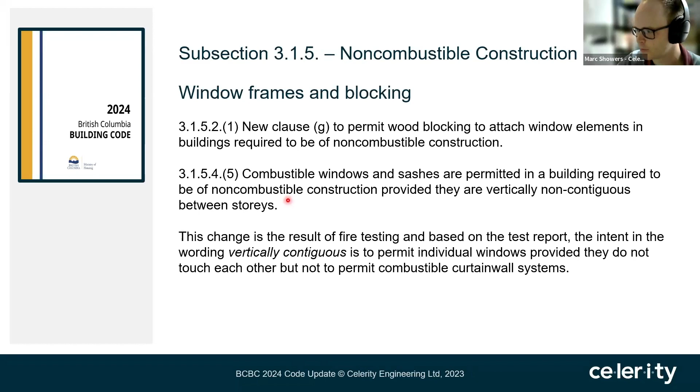All right, next we have a topic that's caused quite a lot of confusion, I think, in the past. It's all about fire separations and joint fire stopping. So previously in the code, 3.1.8.3 talks about how do you maintain the continuity of your fire separations. So you have a gypsum board wall butting up into a masonry wall or some other type of construction, two dissimilar types of construction. What do you have to do there? It used to just say you need to maintain the continuity. It didn't really tell you how to do that. So this has been clarified quite a bit.

It now actually has a standardized test that you need to provide. And this is a system that's tested to CAN-ULC S115 and has an FT rating that's the same as the fire resistance rating of the two abutting fire separations. This is something that's been done, I think, quite a bit in industry previously, but now it's actually written into the code this way. So just be aware of that.

Exterior wall joints similarly have been clarified. They provided this ASTM test standard that you need to meet. Often what would come up before is a municipality would request an engineering judgment or an alternative solution to allow you to use a system that was tested to this standard. So just be aware, if you have a curtain wall system, you do need an actual tested fire stop there between the curtain wall and the slab edge.

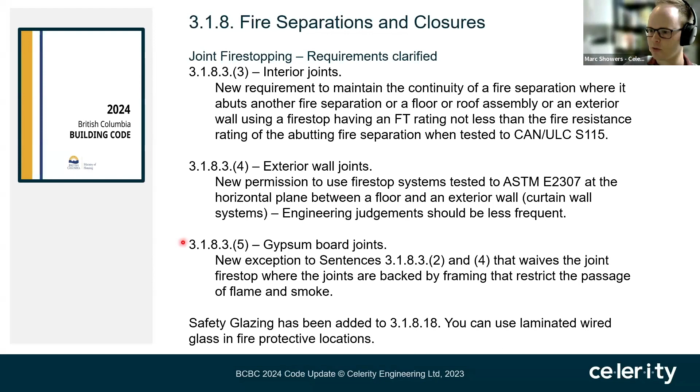Okay, mid-rise construction. This is specific to 5- and 6-story light wood frame construction types. There's a few relaxations that have been added in here, actually.

You may know, if you've done these types of buildings previously, you had to have 10% of the building perimeter within 15 meters of a street. That requirement was actually removed. So now you just need to have your principal entrance within 15 meters of the street, but there's no minimum perimeter. I don't think this will affect many projects, but it will allow some different sites to use this construction. If you have a long, narrow site, this might come into play.

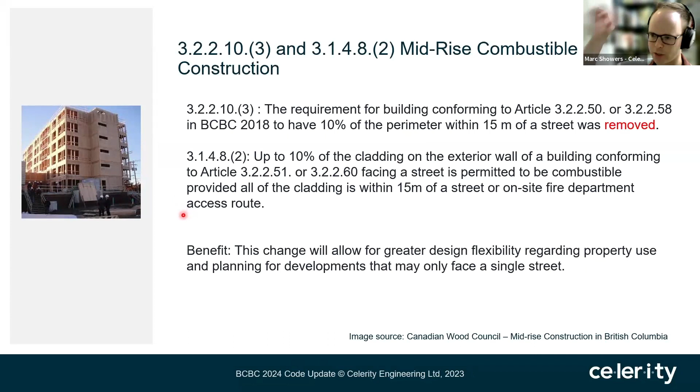There's also been an allowance added to use some combustible cladding for these types of buildings. Previously, it was really limited to non-combustible cladding, but they've added an allowance for up to 10% of cladding on an exterior wall within 15 meters of a street or fire department access route to be combustible. So kind of a feature wall close to the street can have a bit of combustible cladding. Just a bit of extra flexibility for these types of buildings, which is nice.

I'll probably go through most of this stuff fairly quickly until we get to washrooms, because it's relatively straightforward. Accessibility and washrooms is where a bulk of the changes have come in. So bear with me if I go through some of this a little bit quickly.

Door widths, so egress and accessibility alignment. There's been an increase in the required door width from 800 to 850 clear width. That's applied in 3.3, which is safety within floor areas, so that would be most places in your floor area or your floor. It's also applied in 3.4 for exits, so those have also increased to 850. You'll have to make sure that you're meeting that. Generally, that would mean a 3-foot door in most locations.

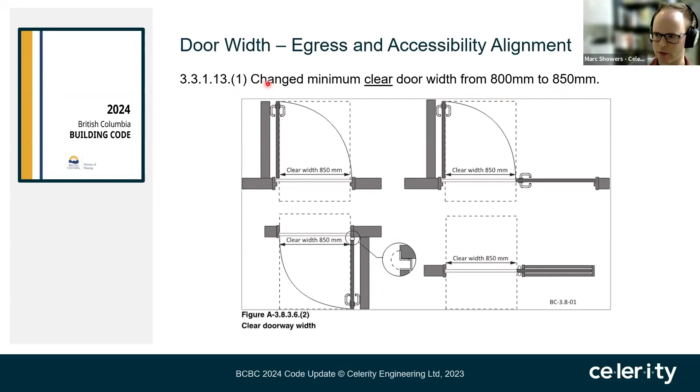Tactile warning. This was a bit of a source of confusion in the past. The code wasn't really super clear where you needed these things, or if you needed them in exit stairs. It's been clarified that you don't need them in enclosed exit stairs anymore, or enclosed stairs in general. So in most cases, exit stairs, you wouldn't need them. You would need them if you had an open stair to a mezzanine or an interconnected floor space. I believe the intention is that if somebody is going into an exit stair, even if they're visually impaired, they're generally expected to be aware that they're going into an exit stair. There's some new requirements around signage that we'll talk about in a minute to address that.

But for any unenclosed stair or other types of drop-off edges, you will need to have a tactile warning. The standard for how these things need to be designed has also been clarified. They now need to comply with the CSA B651 accessibility standard, so that'll look like something like this. You're seeing these more and more places, these truncated domes, I believe they're called. If you're reviewing product information, you'll probably just need to check that it does meet that standard. You can't just apply a strip of sandpaper or something, like you used to see sometimes. There wouldn't really be much done there. So it's a little bit more standardized now what you need to do. Just be aware of that.

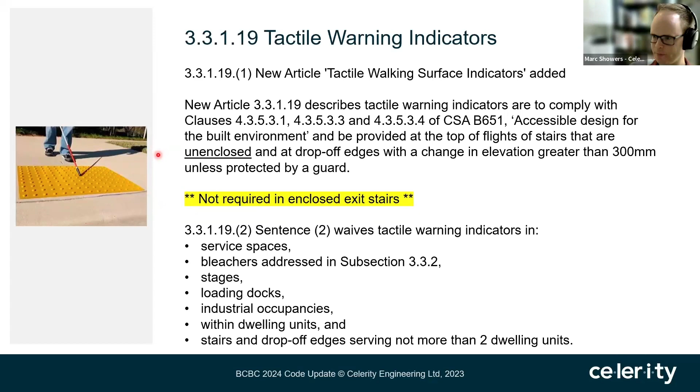Safety glazing. This has to do with wired glass. I think wired glass has been a bit of a contentious topic in recent years. It doesn't achieve an impact rating, or maybe it used to, but that's been removed. So there's a risk of severe injury if somebody runs into these things. You could still use wired glass, especially where there's a fire rating required. That hasn't changed. The only thing that's been changed is this new requirement in 332, specific to assembly occupancies. They need to have a safety film added to the wire glass so that it does achieve an impact rating. So you can use the wire glass, but it gets a laminate applied to it so that you can't break through it anymore, basically.

And that also applies to shower and bathtub enclosures. I don't know that I've ever seen wired glass used in those cases, but it does apply if for some reason you were to do that. Again, this is specific to assembly occupancies, at least in 3.3.2.17. So just be aware of that. I think wired glass generally isn't recommended where there's an impact risk, even in other occupancies, but that hasn't really translated into any changes in the code yet.

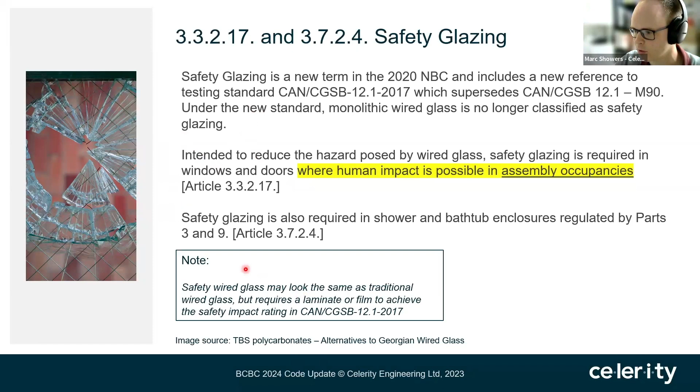So it looks the same as traditional wired glass, but there's a laminate or film applied to it to achieve the impact rating. There's a couple of exceptions for that. I won't go through this in detail, but where you have a door and the glazing is above a certain height, or similarly with windows, if they're above a certain height, then you don't need to meet that impact rating anymore.

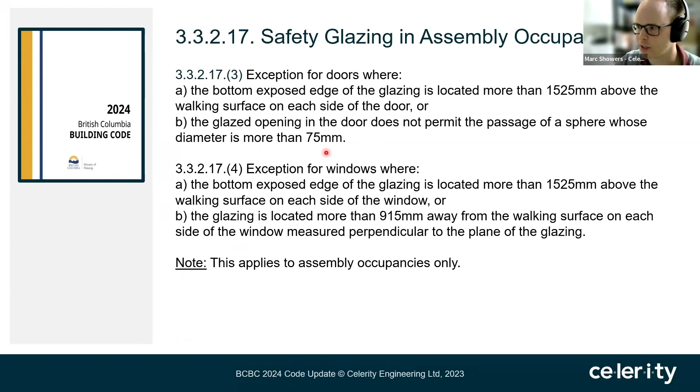Okay, so now we're going to move into exits 3.4. Couple of relatively minor changes.

Ramps. So in 3.4, there's a section on ramps. It would only apply to ramps that aren't in an accessible path of travel, because if you are in an accessible path of travel, you have to go to 3.8 for accessibility. However, in 3.4, they've actually changed the slope to a maximum of 1 in 12, which is the same as the accessibility section, so the slope would be the same in either case. The only exception is industrial occupancies, which are allowed to be steeper for interior ramps, up to 1 in 6, or 1 in 10 for exterior ramps. That might happen in a parking garage. You just have to be careful, because if it's in a location that does need to be accessible, which with the new accessibility requirements will be a lot of locations, you would still need to meet 3.8. So be careful if you're going to try and apply this.

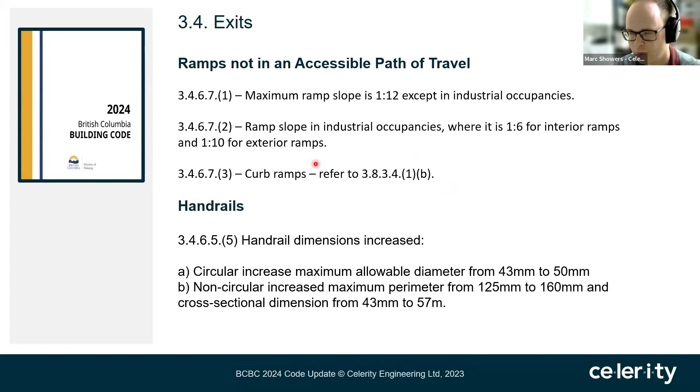Handrail dimensions have actually increased, so it gives you some more options. Circular handrails are up from 43 millimeters to 50, so roughly 2 inches should be okay now. Non-circular, you don't see as many of those, but they've also increased to give you some more options.

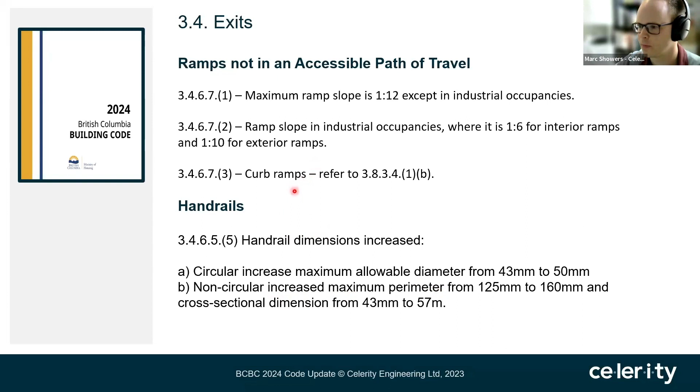Okay, so tactile signage. I mentioned this previously, briefly. This has generally been added throughout the code in 3.4 for exit signage, but also in 3.8 for more wayfinding directional signage. In 3.4, it's mostly the life safety type signage. So on exit doors, you need to have a sign that says in visual and tactile form that it's an exit door. This is a sign on the door. You still need the illuminated exit signage above your door, so that hasn't changed. This is just an extra thing you'll need.

Similarly, any other location where there's a life safety signage requirement, it now requires that to be provided in visual and tactile form. A couple examples here: delayed egress exit hardware, so mag locks, crossover floors. If you need crossover floors, there are signage requirements to say where those are and which floors they are, so those need to be provided in tactile form, and also floor numbering signage within your stairs.

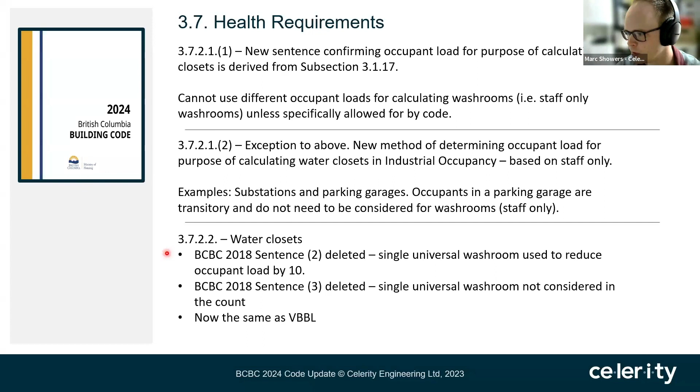That's been like that in the VBBL for a little while, I think, so it's similar to that. But as we'll see, you actually need more universal washrooms, so it's a bit of a trade-off.

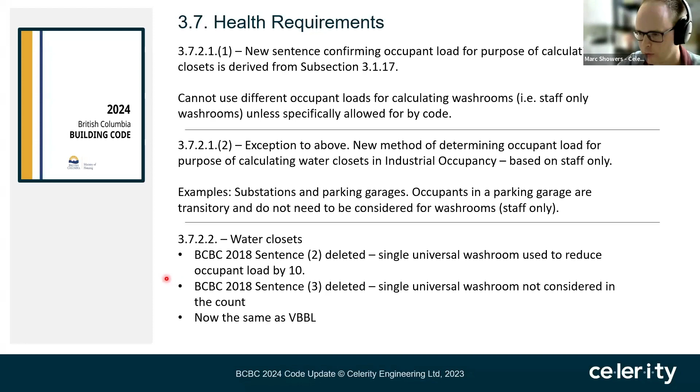Okay, so for the next few slides, don't worry about reading everything here. It's just to show you that there are a lot of accessibility changes. I'm not going through every single thing—we're going to go through the main, most significant points, or at least what I feel are the most significant points.

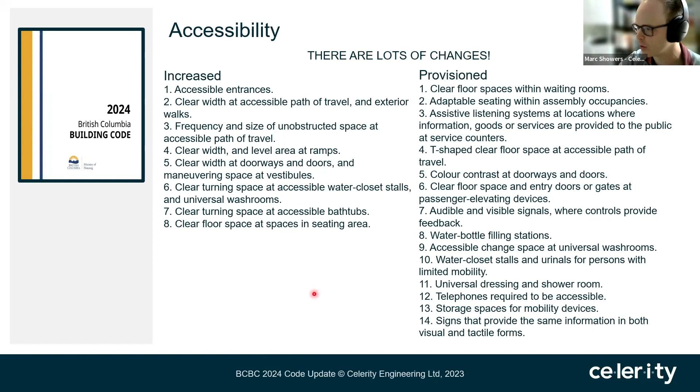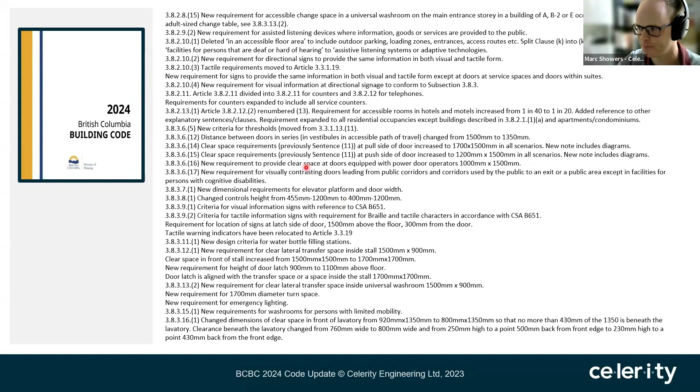So this is like a whole list. You can see there's a lot of little changes. Some of them are just little dimension changes, things being harmonized with the national code, and over time they just move slightly here or there, which is a bit frustrating. But hopefully eventually we'll land on something a little more consistent year to year.

There is a full list of changes provided by the Building Officials Association of BC. If you haven't seen that, I'd recommend going to their website—they have handouts for every part of the code, and everything's listed there. It tells you what's changed, what's just been relocated, that kind of thing. It's quite helpful, so I'd recommend having a look at that if you can.

So this is maybe one of the biggest single changes, I feel, for washrooms. Tying back into what I was talking about with the universal washroom, 3.8.2.2 now requires universal washrooms in each location where washrooms are provided. So basically, wherever you have a bank of washrooms, you need to provide a universal washroom. Before, you really just needed one in the building, or people needed access to one in the building. So this is quite a bit of an increase.

There are some things to offset that a little, like allowing you to count this as one of your required washrooms. The one thing I think isn't clear is it just says 'each location'—it's not clear how far apart is acceptable. If you have a bank of washrooms and then, down the hallway, a couple other washrooms, do you need one in each location? That's going to be open for interpretation, I think, so just be aware of that. We're all kind of learning how to apply the new code, and I'm sure it'll vary by location—different people will have different opinions on it, as these things tend to go. But just note that you'll generally need a universal washroom wherever you have a bank of washrooms.

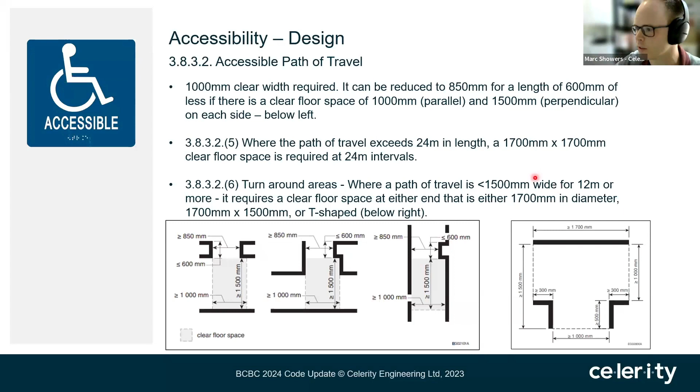So they give you a few options: you can have this 1700 millimeter diameter space, this 17 by 15, or this T-shaped option. So there's a bunch of options. Just be aware, if you're less than 1500 and you have a long hallway, you need to have space at the end for somebody to turn around.

Exterior walk - this one is a bit odd to me. They've increased the width requirement from 1,500 to 1,600 for some reason.

Generally, I don't think it'll be a problem because it's exterior, and usually exterior you have more space, at least to the entrance, and then some clear floor space around the door. I think the next slide has a bit of a diagram to show that.

There's also a reference to the CSA requirement around how to design these things. It covers how you need to have your route separated from a vehicle route. So if you have a walking path, it needs a curb, a railing, or a tactile indicator to the adjacent vehicle route.

There's also requirements around traversing through vehicle areas. I need to look at this in a little more detail myself to fully grasp what it means, but I think it's mostly talking about where you're having to cross a drive aisle or something - you need a proper crossing for your path, so somebody's made aware that they're entering a vehicle path.

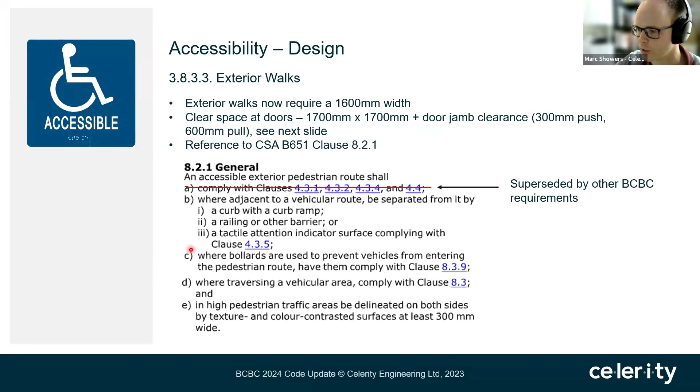This is the diagram I was mentioning about exterior doorways - you need to have a little bit larger clear floor space. This slide also covers ramps, which have been reduced to a minimum width of 1,000 millimeters.

There have been some slight changes, I think, to the intervals for intermediate landings. If you have a long ramp, you need one every 9 meters. So if you're designing a ramp, I would encourage you to check this section and make sure you're meeting everything in there.

In general, I don't think it's much more difficult - it's fairly consistent with previous requirements, just some slight changes.

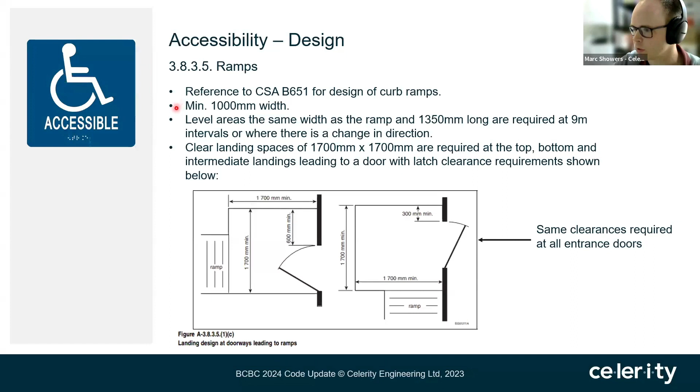So door clearances - definitely make note of this. I would encourage you to have a look at this diagram, which is in the notes to the building code. It's all written out in words in the actual body of the code, but I find that a bit hard to understand, so this is definitely helpful.

I believe everything in here is correct. I know sometimes they post diagrams and they don't quite line up with the wording, but as far as I know, this is all fine.

The biggest changes, I think, are for doors without a power operator on the inward swinging door. On the approach where you're pulling the door towards you, the size of this rectangle here has increased.

Now it's 1700 by 1500 that you need. It can be in either orientation though, so there's a little bit of flexibility there - if you have more space in one direction or the other. But it used to be a bit smaller than that. I believe this one is more or less the same.

And then sliding doors - I can't recall if that has changed. I don't see too many sliding doors, so just note that. With a power operator, it gets rid of a lot of the side-to-side clearance, but you still need the depth - the depth doesn't really change.

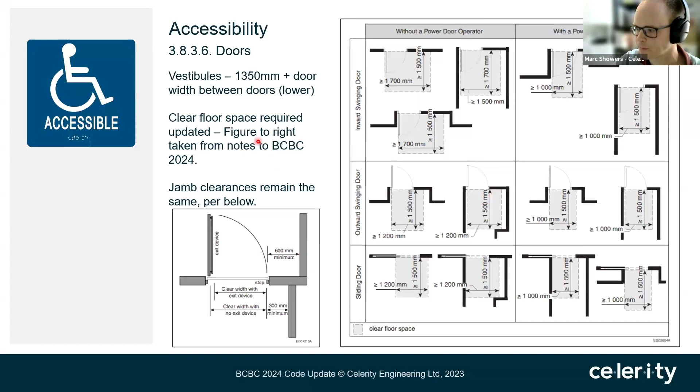I mentioned this before - this is just the accessible stall that we were talking about briefly. The dimensions have changed for in front of the stall. You now need a 1700 by 1700 clear floor space in front of the stall - I think that was 1500 before. So that has increased, and the size of the washroom is getting quite large, so do be aware of that.

Another thing I've noticed on the projects I've been looking at so far that keeps getting missed is this door here is meant to be next to the transfer space. So the location of your toilet does actually matter - if this was over here, it wouldn't comply unless the door was shifted over. So be aware of that.

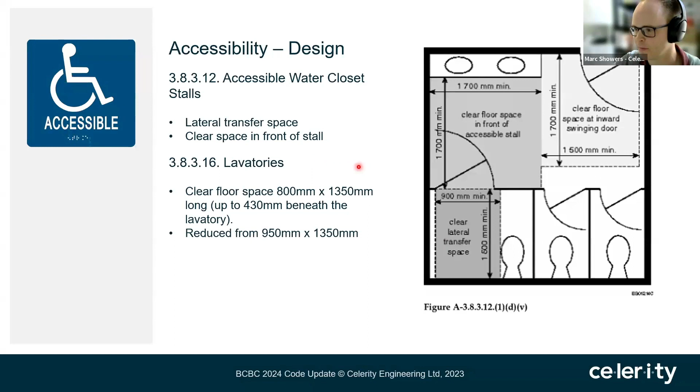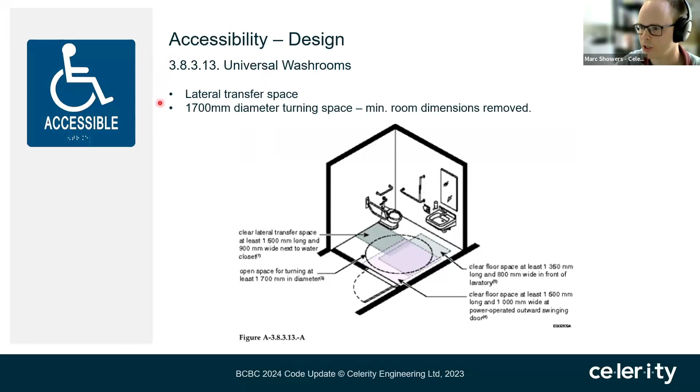Okay, universal washroom design. This just covers the universal washroom. The main change here is just there's no minimum room dimensions. Instead, they've required this 1700 millimeter diameter turning space. That diagram's in the back of the code as well, so you can have a look at that. I don't think there's any major changes there. The biggest one for universal washrooms is just how many or where they need to be located.

Okay, that kind of covers everything for accessibility. As you can see, there's a lot there. I think the biggest things are the washroom requirements and perhaps the door clearances. So the last thing we'll go through today, and this is relatively brief just because this isn't adopted into the code yet, it's the adaptable dwelling unit requirements.

I would encourage you to try and adopt as much of this as you can beforehand, before it even comes into effect, or at least become aware of what's going to be needed in case you have any projects that are at risk of not getting in for building permit before March 10th of next year.

There's nothing out for the Vancouver building bylaw, as I mentioned, yet for the next edition, but I expect they'll probably adopt a lot of these things as well, or at least they won't go less than what's in there. They might adopt additional requirements, but likely you'll see a similar thing if you're mostly doing work in Vancouver.

So I've covered some of it here. It's pretty high level because it's not something that we know too much about yet. I'm hoping anyways that the province will provide more information closer to the adoption date next year. I'm hoping they'll provide some diagrams and things like that. I've heard sort of that we should expect that, but you never know, these things take time. So it seems like we're always getting information last minute these days, unfortunately.

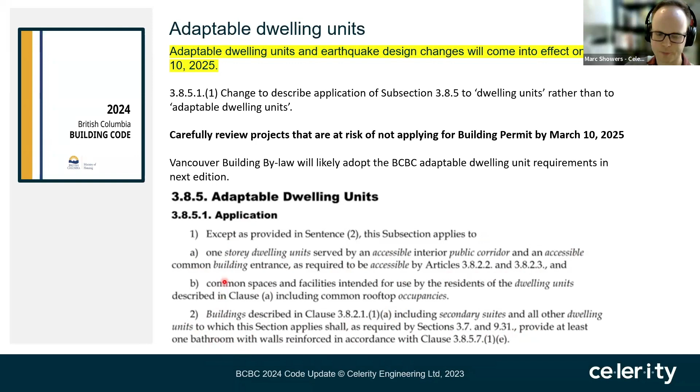And then also, common facilities. If you have a townhouse or single family dwelling, anything that's not a sort of apartment style, the only thing you'll really need to meet here is the reinforcing for grab bars. So with that in mind, apartment style buildings will have to have these special outlet boxes and cover plates for future strobes. They'll have to have at least one adaptable bedroom, bathroom, living space, and kitchen where provided. If you just have a studio apartment, it might not have a separate living space. That's fine. But the bedroom, kitchen space, living space would have to be adaptable along with the bathroom.

And then clear floor space at doorways has to be met, and then accessible hallways and corridors need to be provided. So it does go into more detail in each of the articles about what that means. So for example, doorways, you have to provide 850 millimeters clear width connecting living space, adaptable bedroom, bathroom, and kitchen. If you have 2 bedrooms, you don't need to make them both adaptable. Just at least one of them has to be adaptable. Similar with the bathroom, you don't have to have all of your bathrooms be adaptable, but at least one of them would need to be.

The clear floor space requirements are the same for the doors as they are in the rest of the accessibility section. There's no reduced width. It's this thing still, this table. It does note that you can use a rough-in for a future power operator to reduce those clear floor spaces. So if you're really having a hard time meeting them, that is an option. I know that that's been done in Vancouver quite a bit. You would still have to meet these requirements though for the power operator. So just be aware of that.

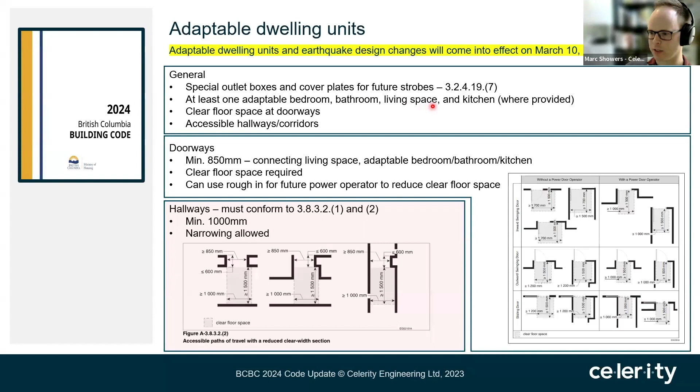And then hallways have to be a minimum of 1,000 millimeters. So it's the same as an accessible hallway. You can have the narrowing like in this diagram still, that's fine. And this would apply to each of your adaptable bedroom, bathroom, living space. So if you have other rooms that don't need to be adaptable, you wouldn't have to meet that.

One interesting thing to note is in the body of the code, there's nothing about bed size. So it doesn't say you need to meet a queen bed or a bed of this size in the adaptable bedroom. But in the notes, it does say that you should have a bed that sleeps 2 people, because it's in the occupant load section of the building code. It requires you to consider 2 people per sleeping room for occupant load in dwelling units. So I think that's interesting.

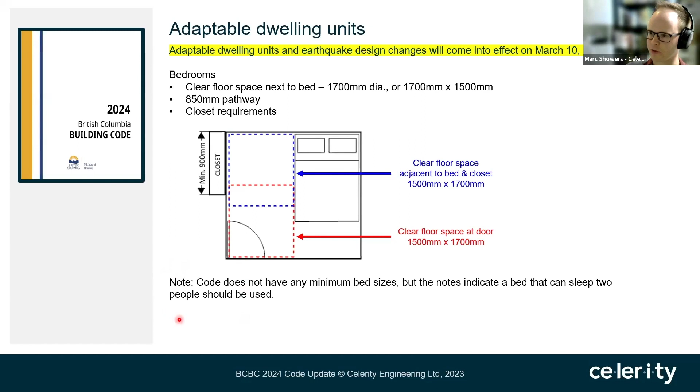I would encourage you to do this as much as possible. It obviously increases the size of your bedroom. I think micro suites, or very small suites, are going to be an interesting topic when it comes to these things, because it might be challenging to meet all these requirements. It might mean that they can't be done. I'm not entirely sure yet. So anyways, that's just an interesting note. I would encourage you to maybe have a read through some of these things just to form your own opinions.

And the last thing we'll touch on here are just the bathrooms and the kitchens. I haven't drawn out anything for bathrooms. I think that as the architecture community, this is something that you should have a look at and try and come up with what types of configurations are the most efficient space-wise. The biggest thing is that you do need a clear lateral transfer space for the toilet. So a lot of traditional bathroom layouts where you have a sink, a toilet, and then a bath or a shower won't meet this. So you do need to have either a larger space or some sort of rearranged space.

And then you also do need to have accommodations for reinforcing in the walls. You don't have to provide grab bars, but you have to provide reinforcing. And that means your toilet needs to be next to a wall, which often it's not in most traditional layouts. So that's, I think, a pretty significant change, maybe more so than any of the other stuff in this section.

And then finally, with kitchens, cooktop and sink need to be adjacent or have a continuous counter between them. So this type of layout here, where you have an island kitchen with a sink and no counter between the cooktop and the sink, you can't do that anymore. You could have your sink over here where it's not right next to your cooktop, but it at least has a continuous counter between the two. I think that's just to help people who have limited strength to move things between the two if they need to.

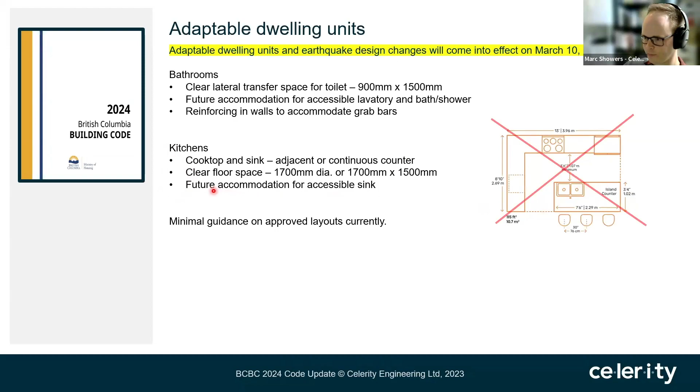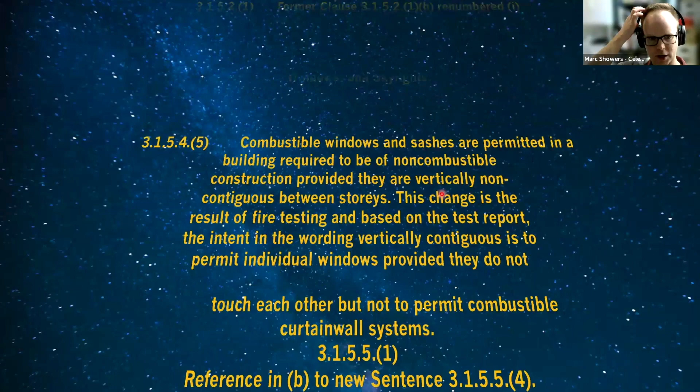So with that, we're done. Here's a fun slide just showing the huge list of changes. I would encourage you to search out that BOABC list because it does cover everything. I think it's quite helpful. And yeah, I think with that, we will move on to our question period, unless Brian, you had anything else you wanted to share?

No, I don't have anything specific. I think that was excellent, Marc. Yeah, thank you very much, Marc.

Yeah, really appreciate that. And I know these adaptable dwelling unit changes are causing a lot of concern among our industry, especially because if you're starting a project now, chances are you're going to have to comply to these new rules. What my office is actually working on right now with the CHBA and with the BC government is trying to find some clarity over a lot of this ambiguity. So we've been working with them. Okay, well, that's great. Good to know.

The size of the bedroom, for example, is a big concern, right, and how that will work. But also, you touched on there with your idea about the kitchen island, the degree of change or the degree of construction that can take place and still be classed as adaptable. Yeah, that is exactly not clear. Exactly, yeah, so we're working on that as well.

And also, there's talk of what projects this affects. So we're talking to BC government about this as well. There's talk of there being some relaxation for projects that are in stream, but none that I've seen has been clarified yet. Well, it's good to know that you're involved in that and that the questions are being asked, I guess.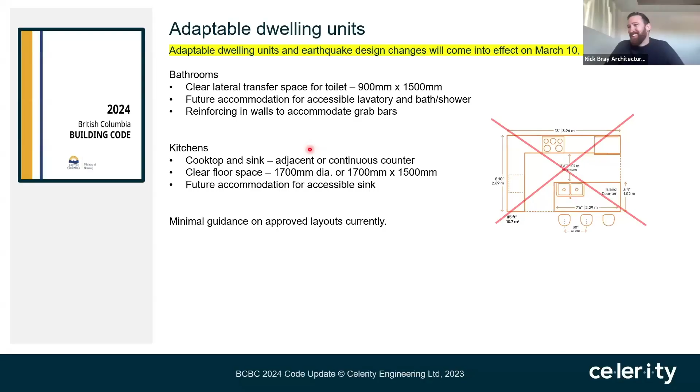Kate asks, how will this affect lifts, like Garaventa lifts, platform lifts? Will the dimensions apply to those? That is a good question. I don't have the answer to that right off the top of my head. Let's see if it's on my slide. Not sure, I will have to review that. If you want to send me an email about that one, maybe I can get back to you.

A final one here about accessible doors: if two doors in series swing inward into the same vestibule, what's the new required clearance between the two swings? Good question. I believe that has changed from 1500 down to 1300 - don't quote me on that, but I believe it has reduced. That would be covered under 3.8.3.6, which is doors, I think the last thing in that section. It says we have two doors in series swinging - it doesn't matter if they're swinging into the same space or not. As soon as you have two in series, there's a minimum distance, just the distance plus the door swing. So if you have two that are swinging into that same space, you have to consider both of the door swings.

Fantastic. Maybe just worth a couple of questions here regarding adaptability. I think it might be worth providing some clarity, Mark, on what is going to be implemented in March 2025 and what effectively has to be complied to now - obviously the accessibility. Yeah, sure.